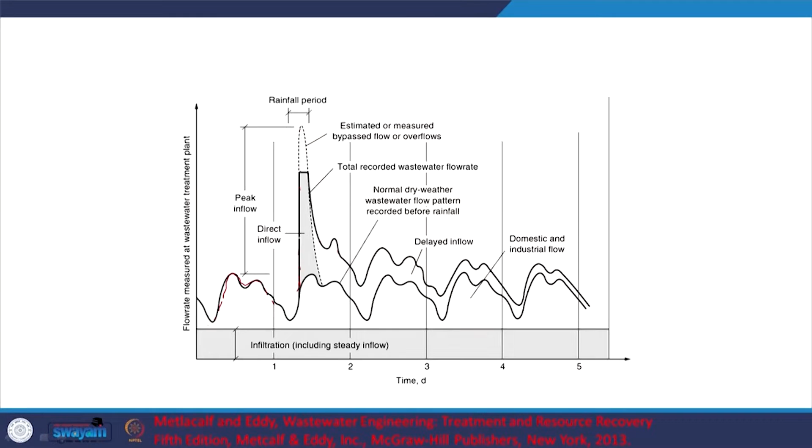So let's move on. So we started discussing this aspect and we saw that within the day there will be variation, and depending on external events like rainfall you will have variation, that is typically seasonal variation, and you can have steady state flow, but typically in Indian conditions you will not have that, but within the day certainly you will have variation, and within the season too you are going to look at variation.

So to take care of this, people build equalization tanks, as in you are letting the flow come in, and let us say I am building an equalization tank with retention time of 10 hours. How will that help me? It will see to it that if I am having continuous mixing, the concentration is more or less the same within that equalization tank before it goes to my particular unit process.

And please note that these unit processes, at least in a wastewater treatment plant, typically include a biological process where the bacteria are going to degrade or help catalyze oxidation of your waste, which is the substrate or food for these microbes. So similar to us, bacteria do not like shock loads, the term is shock loads, or to eat a lot within a shorter period of time, right.

So typically we are healthy when we sleep well, we maintain our fitness and eat a limited amount and more or less the same amount every day. If you eat a lot within a short period of time or do not eat for a longer period of time, obviously you are going to be affected. Similarly, I would like to use layman's terms and apply that analogy to the microbes, right. So you want to avoid shock loads. So the equalization tank will help in that.

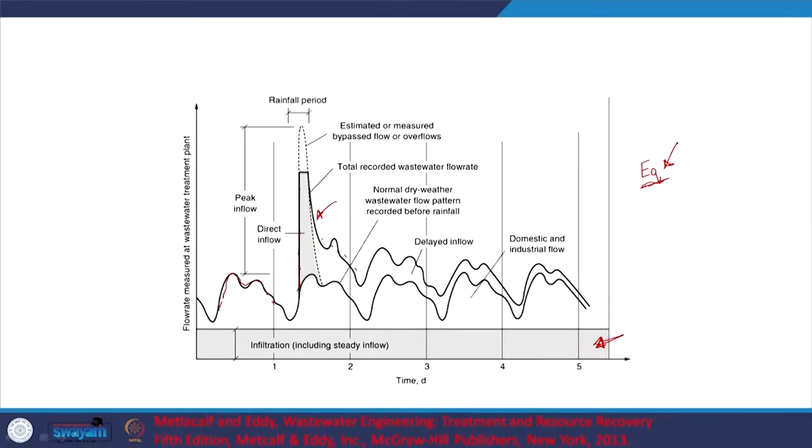Here is data from a dry weather day, right. So what do we have here? We are starting at midnight to midnight, a 24-hour period. As we see, it is peaking around 10 a.m. or such. This is from relatively recent data, I believe. And again the reference is given out here, Metcalf and Eddy, the 5th edition. So what do we have out here?

So we have an increase in the morning, when people go through their daily ablutions, and then a decrease during noon, and then another peak during the evening, and obviously a considerable decrease during the night. So that is what you see out here. And the average dry weather flow is somewhere out here, it is 106 meter cube per day, right. So that is something to keep in mind.

And in the previous session, before we ended, we were talking about peak factor. That will give us an idea about the peak.

But the peak is not an instantaneous peak, as in the absolute peak for this day is this particular point. Instantaneous peak flow rate is 187, but I am not really concerned with these instantaneous peak flow rates. I am concerned about sustained peak flow rates. Let us say, what is the maximum flow that was maintained for an hour or 2 hour period.

So let us say the peak hour flow rate, as we can see, is out here, and I guess people mention that as 183 meter cube per day. So, for this peak factor, typically people, at least in the developed countries, look at the 2 hour maximum. Here we have the peak hour flow rate. So, 2 hour peak flow rate, let us say.

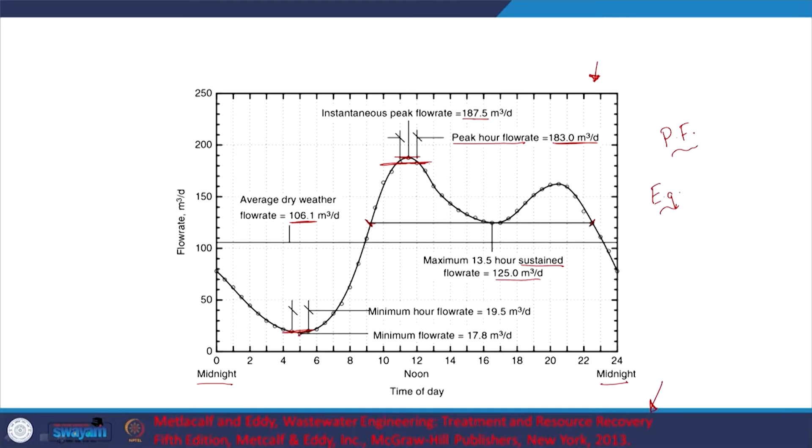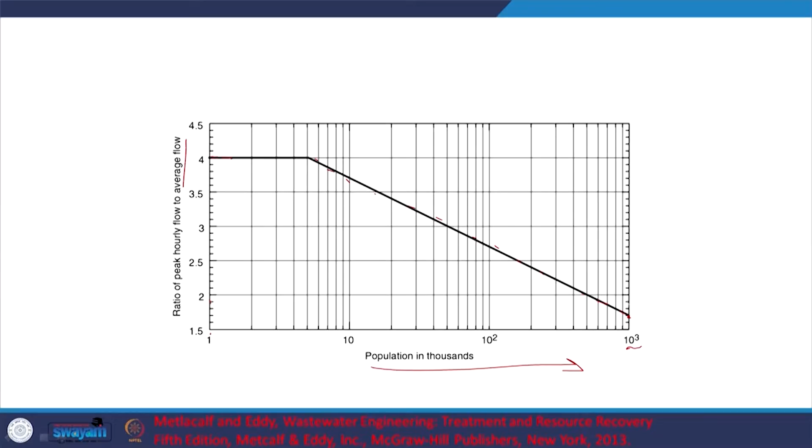But as you can see, for smaller communities this ratio will be pretty high, and for larger communities, with increasing population, please note population is in thousands here, and also a logarithmic scale. So, we see that for 1 million or 10 power 6 population, the peak flow rate or the variation is much less, because you have a lot of people, a lot of activities. So, the flows average out in general. So, that is something to keep in mind.

India, at least as of now, we are not really capturing this level of population. We are building STPs only for, let us say, this level of population, starting from somewhere around here. As we develop as a country and have greater capital available for infrastructure development, we are going to look at capturing the sewage from these particular communities too. So, that is one thing to keep in mind.

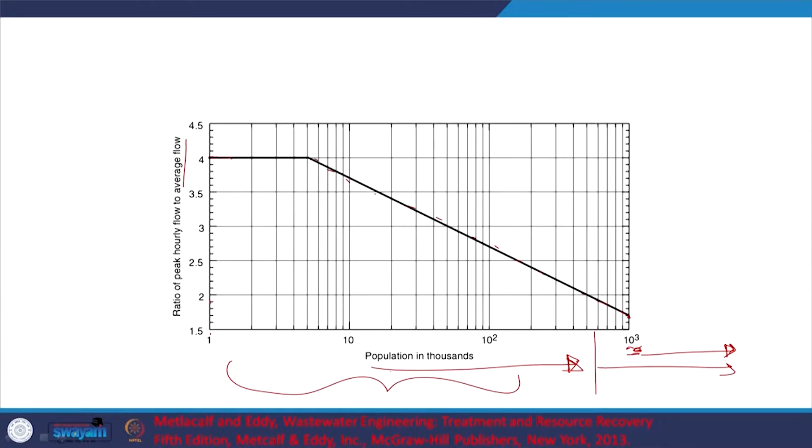And this is the CPHEEO manual, I am just referring to it for the first time. So, we have a manual, I think it was last updated in 2013, if I am not wrong. It is relatively detailed, at least for the Indian context, and it will give you an idea about the design, the maintenance, the financial aspects and such with respect to the Indian context. So, that is something that you can always look at.

So, in this particular table, what do we see? We have the peak factor for contributory population. So, as you see, for population between 50,000 to 7.5 lakh, the range above which we typically start building sewage treatment plants in India, we see that the peak factor is relatively less compared to the case when the population is low.

But again, in India, they are not really looking at peak hourly flow rate or 2-hour peak flow rates as they do in the relatively developed countries, because again we are some way off here. Again, if we are looking at bigger populations, you see that the flow averages out, and that is what we see here.

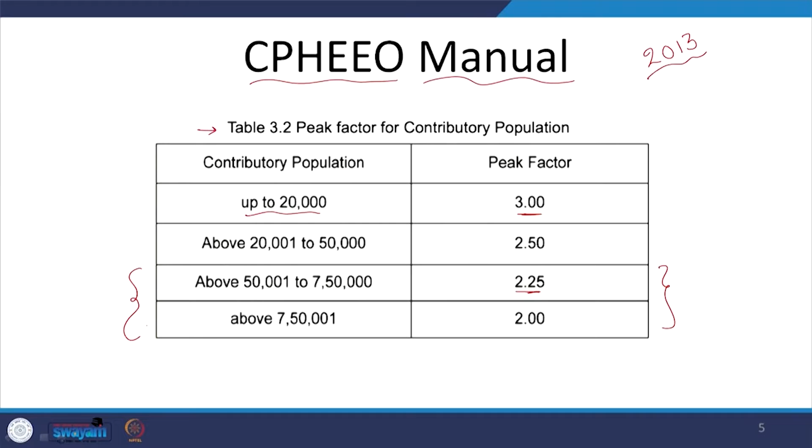So, let us just discuss why I need to be concerned about this variation in flow with time. One is obviously the impact on hydraulics. Let us say if you have uniform flows, the relevant machinery is going to last longer, or you will not really need to be varying your pump usage and such, depending on the flow rate. So, obviously hydraulics plays a role with respect to the machinery.

Another aspect is, let us say right now I have a tank of this size, and that is designed for the average flow. But if I have peak flow and my design did not take that into account, I am going to have to increase the discharge, and if I increase the discharge, what does that mean? My wastewater is not spending enough time in my reactor, and thus the concentration of the organics in my effluent or discharge is not going to be at the level that I desired, because it is spending less time in the reactor. So, these are the aspects that we need to be concerned about.

And another aspect is treatment effectiveness. We typically have two major classifications, primary treatment and secondary treatment. Primary treatment, we are talking about sedimentation or coagulation and flocculation if used. They depend on gravity, and so they are not very sensitive to changes in flow, because gravity is ever present, or you can easily change the dose. So, their effectiveness is not adversely affected by time-varied flow.

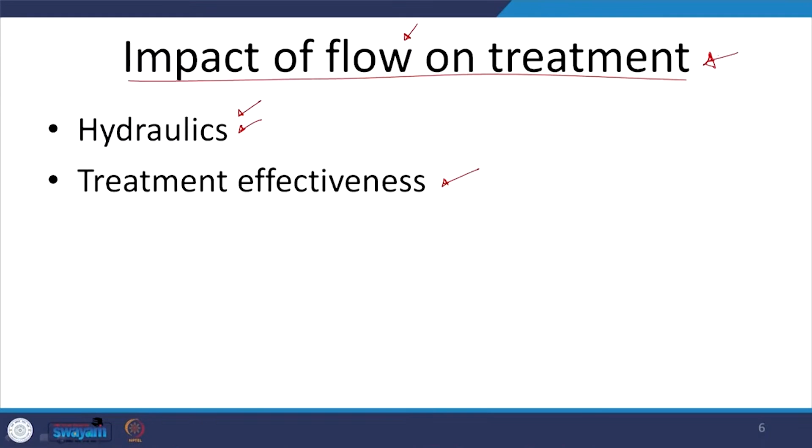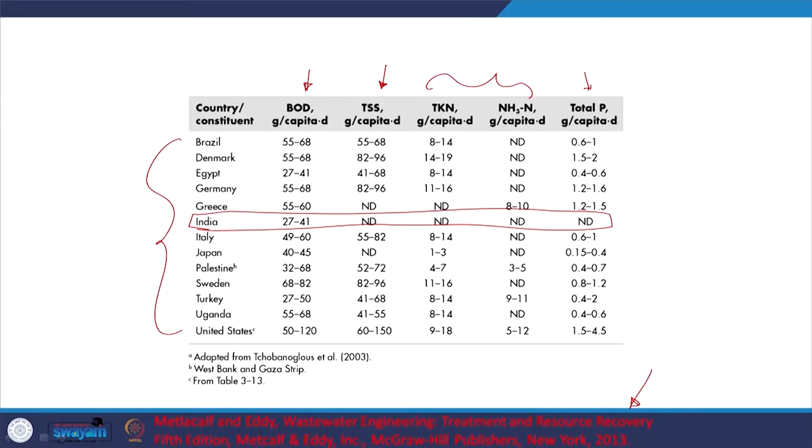And then let us look at the concentration of the relevant compounds that we are concerned with. Here we have the organics, which we are measuring by BOD, suspended solids, nitrogen content, and phosphorus. We have different countries, and India is here. These people did not have the data for suspended solids, nitrogen and ammonia. But at least with respect to BOD, you see that we are at the lower end compared to most. I guess only Egypt is along with us, at least in these countries.

So, we see that it depends upon the level of development, let us say, is it a relatively more developed country or a developing country, and the kind of food habits obviously will play a role, relatively more vegetarian or non-vegetarian food intake and such. And obviously class or purchasing power is going to affect the quantity of waste you are going to give out.

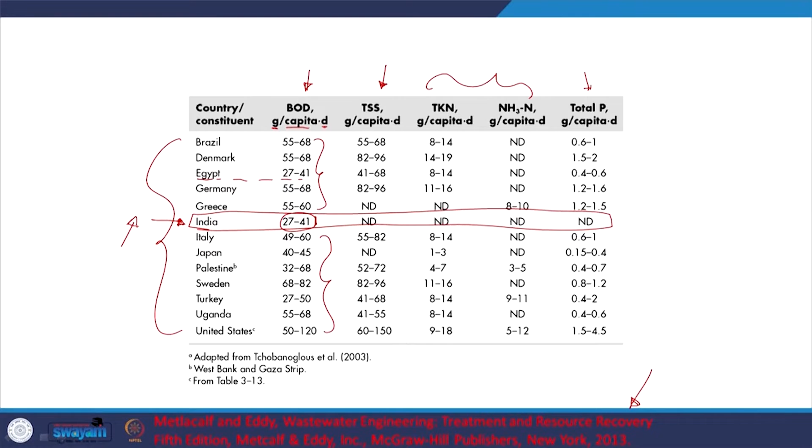So, here we have BOD in grams per capita, meaning per person per day. So, as you see, Indians I guess are relatively contributing less waste to nature. So, that is something to keep in mind, but obviously with increasing industrialization and increasing purchasing power, even our contribution of waste to nature is increasing now.

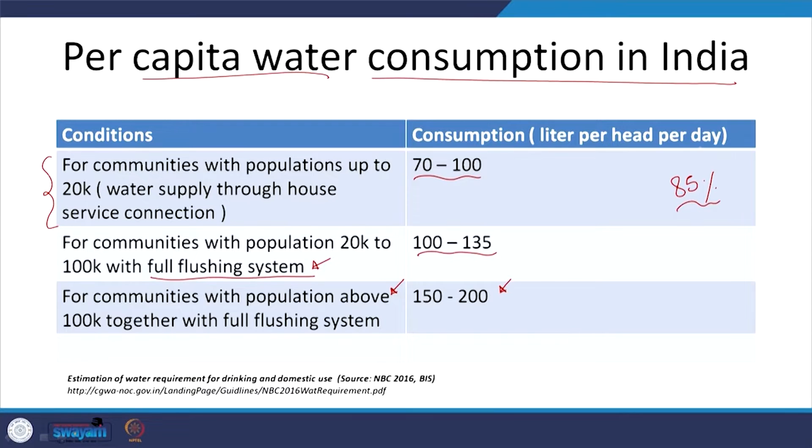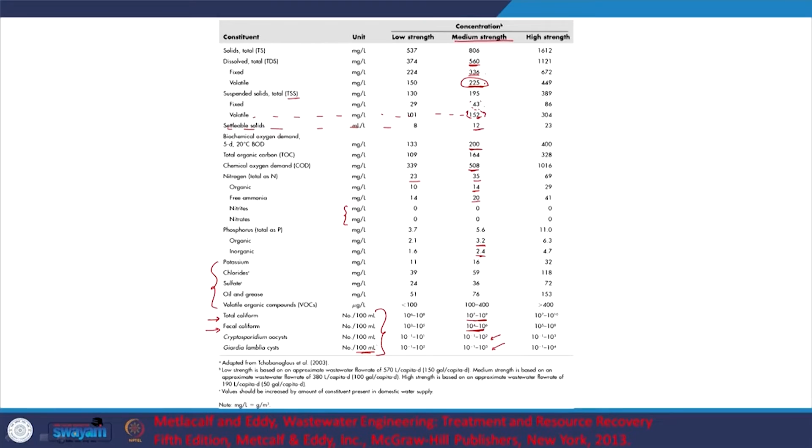And then here we have the total coliform and fecal coliform. So, we have considerable concentrations of these coliforms and different cysts, considerable numbers per 100 ml sample. So, more or less in India at least it is 150 milligram per liter BOD, and COD typically twice or 2.5 times.

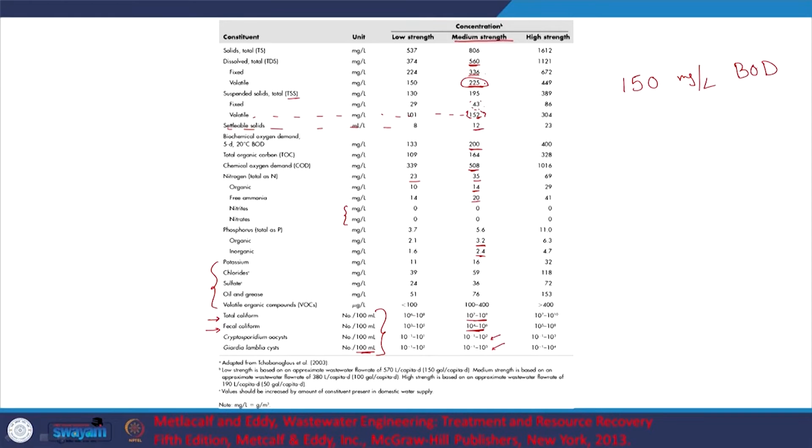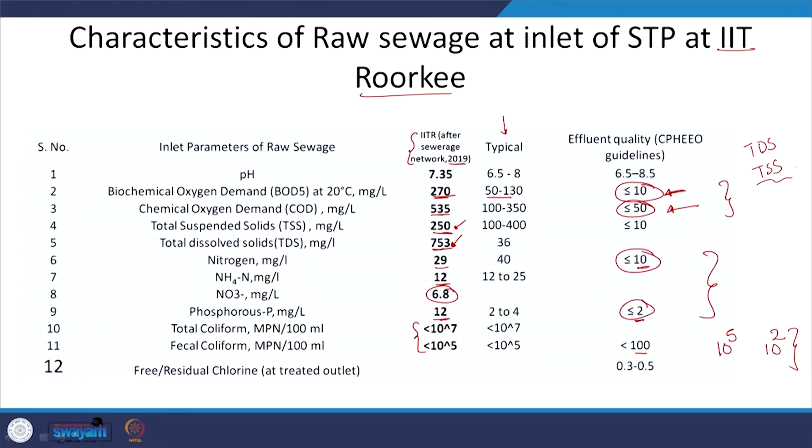Let us move on. So, one aspect is concentration, but obviously we are concerned with masses. It is not just concentration; concentration is mass per volume. So, I need to look at the mass, not just mass per volume. So, I need to look at the flow rate. Flow is how much water is coming in per time. So, with that I will get mass per time. So, that is this BOD mass loading, mass per time.

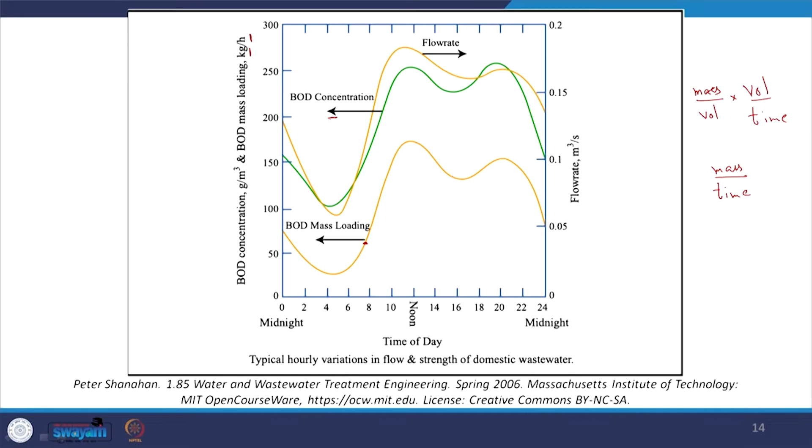So, that is the graph we are typically more concerned with, but for general sewage you see that the trends are relatively similar with respect to flow rate, concentration and the BOD mass loading. So, that is something to keep in mind. So, the general standards for discharge, again the relevant schedule in the Environmental Protection Rules, first came about in 1986 I guess. And here we have National River Conservation Directorate guidelines, but we will look at that later, okay.

But as I mentioned, recently people have been looking at our resources not as limitless, but as something that has a finite limit and something that we should pay attention to. Earlier, with relatively low levels of population and industrialization, that was not an issue, but now we are understanding the importance of our resources, primarily water and air.

So, as you see, we have the National River Conservation aspects that we discussed earlier, and discharge guidelines by the Ministry of Environment and Forests. So, we will just look at the primary aspects. Instead of BOD of 30, though I mentioned 20, people are now pushing for 10, and for suspended solids, instead of 50, we are looking at 30.

And one aspect with respect to suspended solids is that, at least in the effluent, when you measure the suspended solids, it correlates very well with the BOD. So, if you measure the suspended solids in the treated effluent from a sewage treatment plant, that typically gives you some idea about your BOD. That is one reason why you can look at suspended solids in the treated effluent.

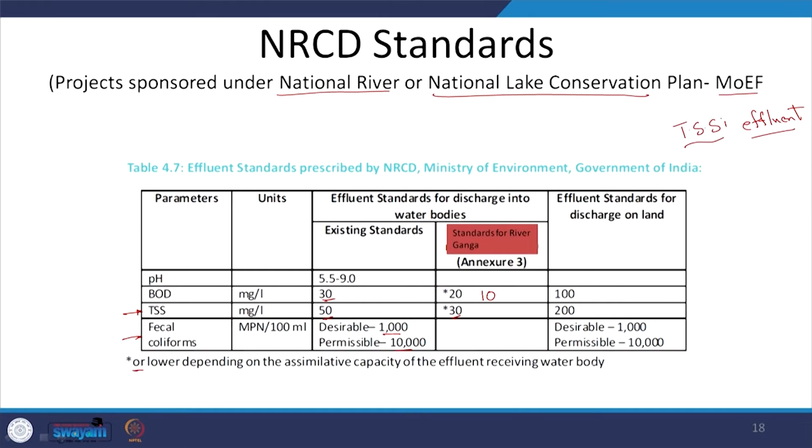So, different states, let us say Jammu and Kashmir, Punjab, have different or relatively more stringent standards. But the issue is always about enforcement, how do you enforce. So, again, CPHEEO guidelines, as I mentioned, MOEF standards, and then we have the recommended values, which are what people are pushing for right now.

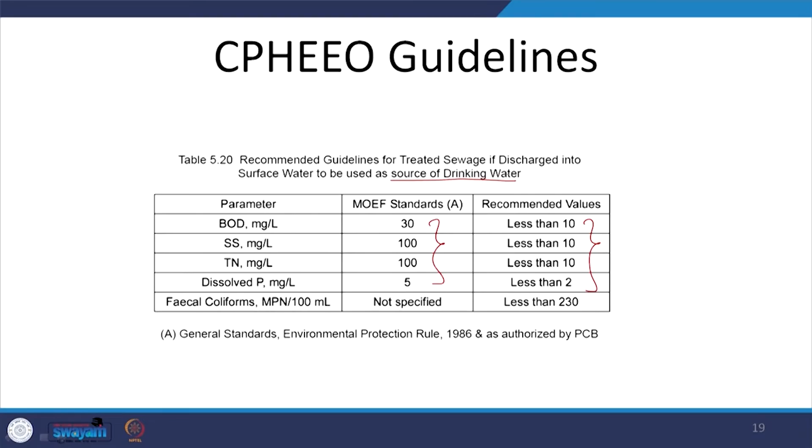So, recommended guidelines for treated sewage if it is being discharged into surface water used as a source of drinking water. But in India, more or less every surface water body is used as a source of drinking water. I believe I have the more recent guidelines, but before we go further, as I mentioned, we have Delhi, Mathura, Agra, Etawah, with huge levels of population, and the Yamuna flowing. So, this person's sewage after replenishment is going to be this person's drinking water, or water for different purposes.

Soon we will not have enough water, so we are going to end up in that case, maybe 100 years down the line. They are already doing it in some countries, at least in South Africa, where they had no water. Wastewater, you treat it to such an extent that it can be used as drinking water. People have a mental block, but it's just about compounds A, B, C and D and parameters X, Y, Z, and if you are able to bring them down or remove them, it is as good as or better than most of the drinking water available out there.

Here, though, we are not at that stage; people in India are nowhere near ready to accept recycled wastewater for drinking. But here we have it for different reuse: for toilet flushing you do not need remarkably treated water, for fire protection, vehicle washing and so on. Crops which are eaten raw and cooked, but I mentioned the issues there. At least in India we can go for toilet flushing because that takes up a lot of volume of water. The issue is that you have to have a separate plumbing network, which we do not have as of now.

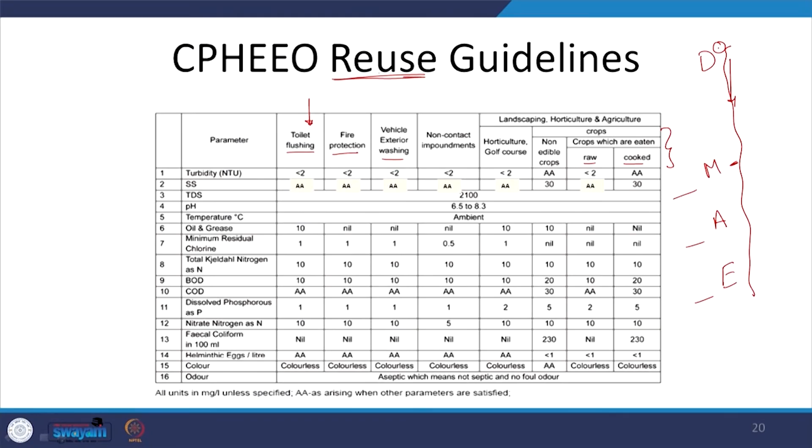So, again different standards are given for this. So, this is the next step I would say in trying to minimize our footprint and see to it that the water resources which are finite can be reused by us, right. So, let us move on. So, this is what I wanted to mention.

So, these are the standards for the new sewage treatment plants, those that are designed after the relevant notification date. As we see, BOD standards are 10, COD is 50, suspended solids 10, fecal coliform less than 230 and nitrogen and phosphorus 10 and 2, right. Slowly but surely we are pressing for relatively low values, but the issue here is that, let me see if I have space out here.

Okay. You know that it is typically mostly a CSTR, right, or even if it is a SBR, it is a batch reactor. Okay, I should not have mentioned SBR in the same breath, but if it is a CSTR, as in flow is continuous and flow is continuously going out, and if you want to have 10 or less than 10, this has to be operated such that most of it is less than 10 milligram per liter. Why is that? In a CSTR, whatever is in the tank or the reactor is what will go out. So, for that you have to have higher HRTs or hydraulic retention times.

But as we discussed earlier, the CSTR is not really an ideal CSTR. You do not have instantaneous dilution. But obviously, if you are trying to build a reactor, going for a plug flow reactor is certainly better because the kinetics are going to be relatively higher, R net for the particular volume. As you can see, R equal to Kc, and the lower I want to achieve, the rate here is going to be very less, right. If this concentration is low, the rate of removal is also low. So, that is an issue that you have with the continuous flow systems.

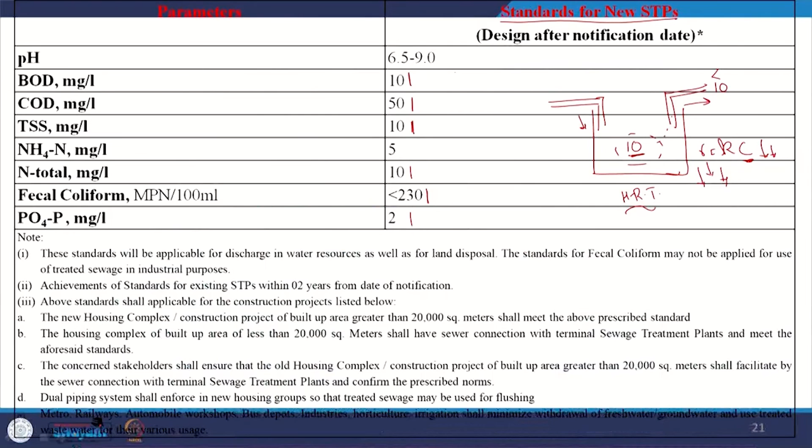But obviously, with SBR, which is a batch reactor or more or less a variation of plug flow, if you want to think of it that way, or with well designed reactors that are similar to plug flow reactors, you can achieve good removal rates. But with conventional sewage treatment plants which are already built, getting to 10 is going to be remarkably difficult, right.

So, one aspect to keep in mind is that in this course we are looking at treatment plants for domestic sewage, sewage from houses and such. But obviously, you have industrial wastewaters. I just wanted to give an example of the general characteristics of oil refinery wastewater. So, what is it? Oil obviously is remarkably high, emulsified oil, hydrogen sulfide is high, right.

What I am trying to mention here is that there is no one size fits all, but in India, due to lack of knowledge I guess, which is what we are trying to address by disseminating the relevant knowledge, we use a one size fits all approach. That is not going to work out. As you can see, you have different challenges here, so you have to modify your treatment plant accordingly. Again, chromate or chromium, so different aspects.

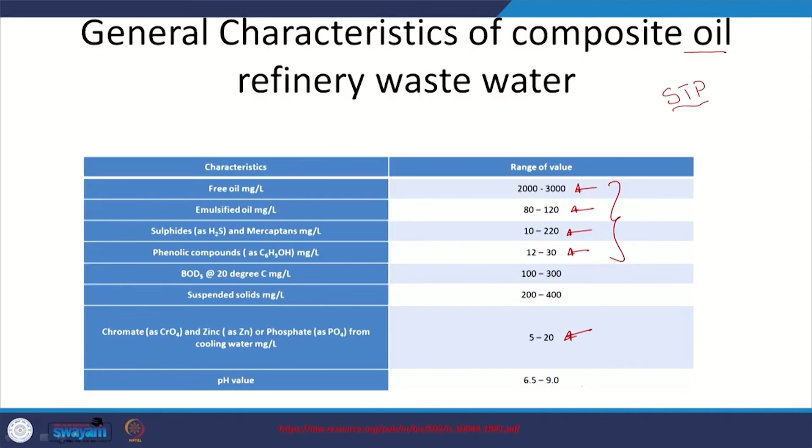And then obviously, for coal mines and such, you have different discharge standards. So, it is not just the industries, you have different mining activities that lead to considerable pollution. That is a grey area now. We are yet to put more efforts into those polluting sources. We do have the relevant laws, but enforcement and will is the issue here. But again, in this course we are looking at domestic sewage.

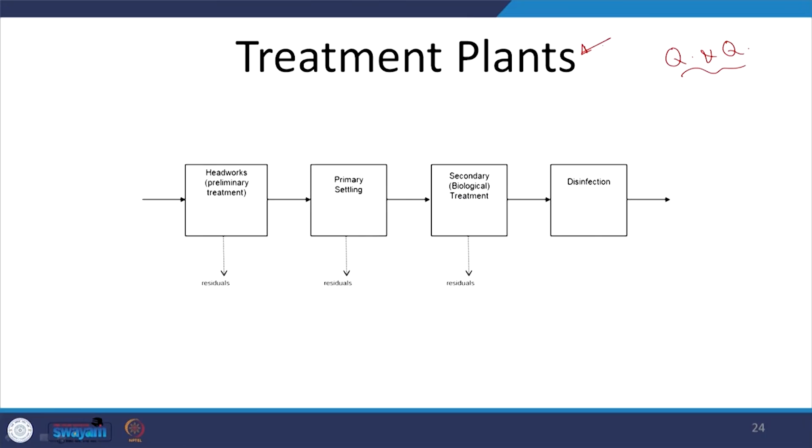So, I am done with discussing quantity and quality. We are now going to start looking at the crux of the issue, the treatment plants, but looks like I am out of time.